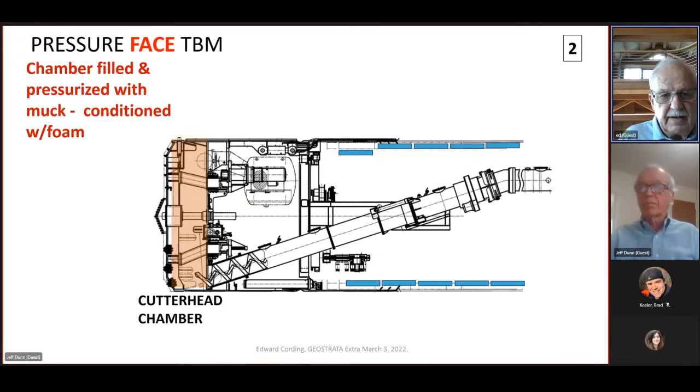So this is a pressure face TBM, and you'll see in the next couple of slides that the chamber in the front is filled with muck, and that's an enclosed chamber. It's conditioned with a foam, it may be bentonite, and that's what's holding the face and balancing the face. The control on that is the screw.

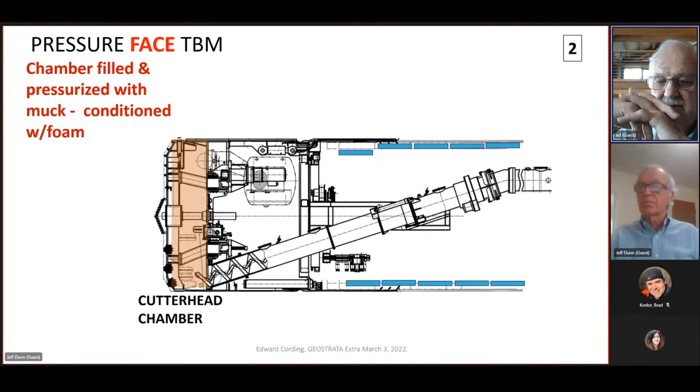In the next slide, it shows the screw, and that's for the earth pressure balance, and that's what's removing the muck. It has to be coordinated with the advance so that you provide the required pressure. So that's what we've done with the pressure face TBM, developed maybe as much as 50 years ago. There's a tremendous change in the understanding.

You would not probably have been using that, and we were not using those machines in the United States 50 or 40 years ago. It's taken some more development for them to be really reliable and all.

But the first criterion is to prevent that inflow at the face. We don't have to dewater, we balance the water pressure, and as you see on the next slide, we balance what's in the front of the face with the pressure we apply. So that's the primary thing we talk about with pressure face TBMs.

And then as you can see on the next couple of slides, we're talking about the pressurized TBM. The first thing that happens is there's muck that can push out around the cutter head and fill the gap, which you have to have to be able to steer it and push the shield forward, which is going to be on the order of about 20 or 30 millimeters. So that gap is going to...

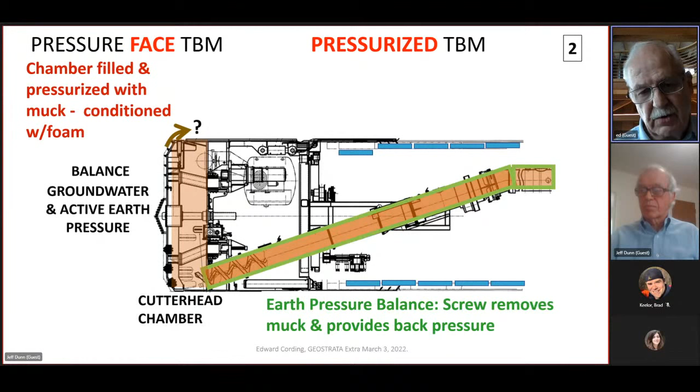We don't want to say we're going to be doing it most of the time and then miss. This is what's causing the settlement, is the lack of filling in that overcut, and that can cause a couple of inches of settlement.

So the overcut shield gap, now what we're using on our projects and requiring on Los Angeles Metro, and required on the large diameter tunnel in Seattle, is that we fill that overcut gap and pressurize it with a bentonite slurry for consistent control all the time. We don't want to lose ground, and that's what's being done.

In the tail, as you can see on this last little bit, the tail of that TBM is where the grout is injected, and it fills the gap during advance. That's become very much a standard, and it has basically eliminated issues with ground loss back at the tail, which can cause 4 or 5 inches of displacement if it's not filled. So those are things that I think we need more progress and effort on, using that shield gap and understanding the cause.

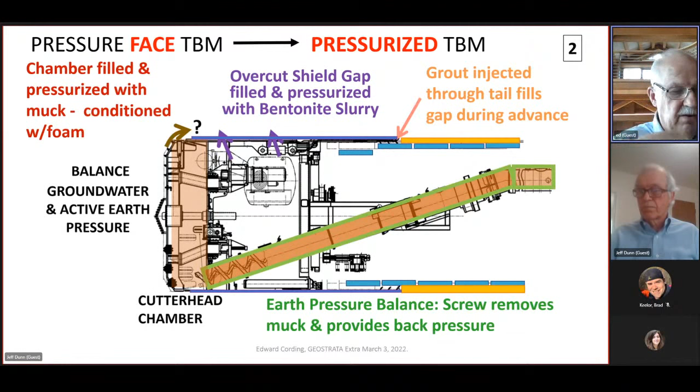As you can see in our next slide, there's several things that in practice we recognize: pressurized TBMs, pressure face TBMs, reduce ground loss, and the muck can fill the gap, but not always. There tends to be a reliance on estimating what can happen by some percentage of ground loss of the volume of the surface settlement trough, based on previous projects.

Often the source of the ground loss is not well determined. For example, if you're measuring the surface settlement, how much is occurring into the face or on the shield? Typically people will say we've lost ground because the face wasn't supported. What we're finding in projects we've had, even over the last 40 years, is that the movements around the shield are what cause the regular settlement trough for the most part. So that's the area you really want to focus on, in addition to the face, in terms of controlling ground.

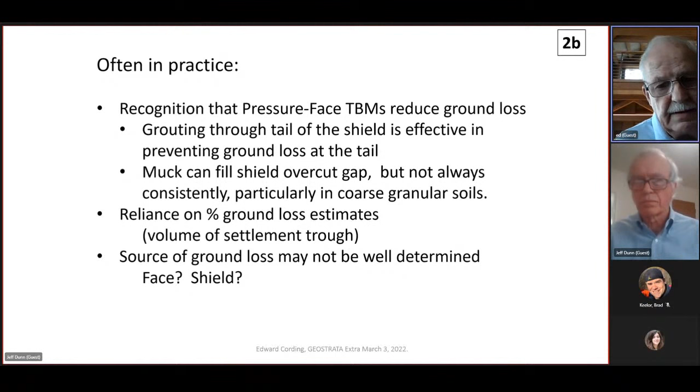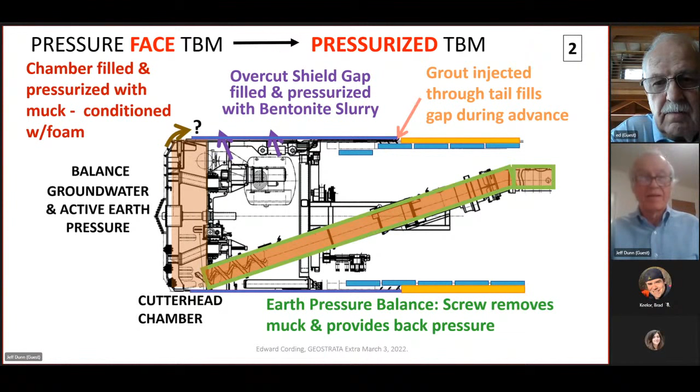Now let's go on a bit here to the next slide. Let's see here. There we go. My mouse wasn't cooperating. Now go the other direction. Oops, I'm sorry, I pushed the wrong key. Well, we'll get it, Jeff.

Here we go. Okay, now we have all this instrumentation that people are doing on projects, but the instrumentation we're interested in for this TBM is not so much what's happening on the buildings. We want to monitor the buildings just to know that nothing's happening. But what we want to know around the TBM is exactly what's happening close to the TBM, related to how we're operating it. This is the information that I really want to see our projects putting together.

One of the issues sometimes is that we have instrumentation people doing the instrumentation and operations looking at the pressures and the operation, but the two often aren't coordinated as well as they should be. With this, now we can identify the source of the ground movements, see what the magnitude is, and show that those movements are small and within our criteria, such that we have confidence that we can tunnel forward and be under control when we go under critical structures.

We're using the borehole extensometer, piezometers in that overcut, and their relationship to the pressure gauges is such that you can tell if you have an outward hydraulic gradient that's holding the ground up, just by comparing that shield pressure and the piezometers. And then we're now using HDD more and more in LA.

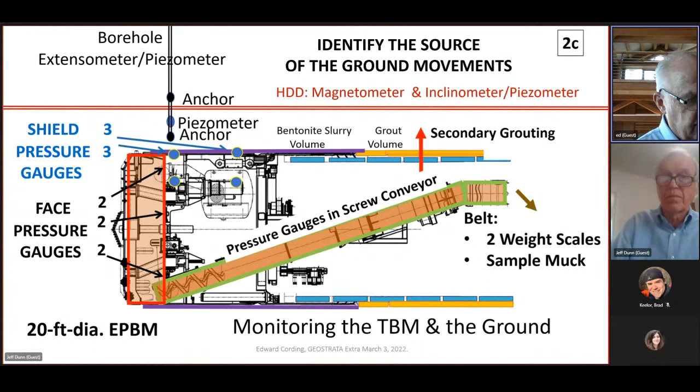So these are the things that figure shows, the things we need to be concerned with, and we need to be correlating those measurements with the pressures being measured on the TBM. To me, that's the reason we haven't made more progress. I think we have made a lot of progress, but part of it has been to recognize just where the causes of the movement are, and then try to work between the various groups involved, such that we coordinate that effort between instrumentation and the TBM.

The other item is large diameter tunnels, and when you're tunneling at shallow depth, that's where perhaps the most progress has been made in this coordination. It really started in Porto, Portugal, with an 8-meter machine, and then Barcelona, with a 12-meter machine, where they were starting to really pressurize or fill and pressurize that gap. So we followed up on other projects in Toronto and the Alaskan Way project in Seattle. It was also a requirement, and we're requiring this in LA.

Good. So that gives us some... oh, sorry, Ed. No, you go ahead.

Okay, so that gives us some really good background on the evolution from pressure face to pressurized face and so on. You just mentioned Alaskan Way and that view of the TBM, which to me is really impressive, 57.5 feet in diameter. You discussed the Alaskan Way viaduct replacement constructed with that large TBM, resulting in surface settlements that were very, very small, which is just an incredible accomplishment to my mind.

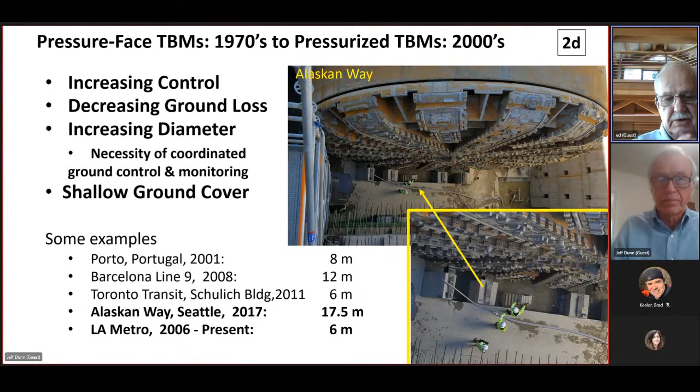So going on to this next slide, there's a couple of points I wanted to make in addition to the fact that we had small displacements. If all we were looking at here, Jeff, was small displacements, we could just add this to the list of projects showing how much displacement we had. But the question is, why did we have that, and can we count on those conditions? What do we need to do to duplicate that on other projects? What is it that is causing the movements?

The two things I wanted to focus on: first of all, once that TBM left Safe Haven 3 and went under downtown Seattle, the viaduct, Pioneer Square, and the high rises, it was underneath buildings almost all the time.

What I saw with the operation, with the joint venture Seattle Tunnel Partners - a joint venture of Dragados and Tutor Perini - was consistent operation all the way through, in two major areas. One was the settlement I'm concerned with, but the other area was with respect to the TBM.

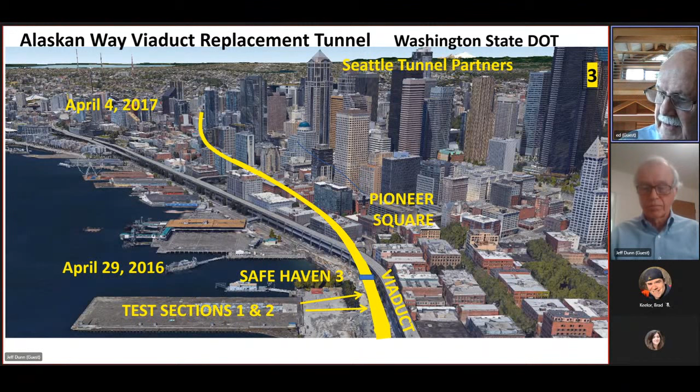The other thing I'd like to point out is this is an 11 month, 5-day project. When you get in a project that's really working and you see a tunnel operation project, it's all a linear system. Everything has to work, there's a rhythm to it. You can see the people working on it are doing a good job, that they like their work and it's efficient, and that's what I was seeing on this project.

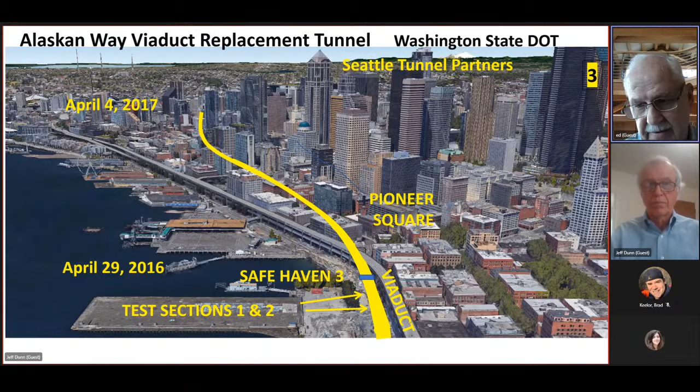Going on to the next slide, a couple points here: the consistent control, not just what I've talked about with the main bearing, but the consistent control of the face. It's not just that we had small settlement—these were the things allowing us to have small settlements, causing only small settlement. Maintaining the face pressures, the upper face pressure is your guide, and maintaining that even between shoves.

They would inject large volumes of bentonite in the chamber to keep that pressure up all the time between pushes of the machine, which are about 2 meters at a time, then you'd have an hour or so for erecting segments, and you'd have a couple of days on the weekend. That's when they kept that pressure up, so they never let it down.

They always vented the upper chamber so that any accumulation of gas bubbles from the muck and foam that would cause a large bubble on top were prevented, so you didn't get free flow of soil into that upper chamber. They vented that throughout the entire drive, back onto the conveyor belt, making sure you don't have a gap up there—a void that's compressed but not supporting the effective weight of the soil.

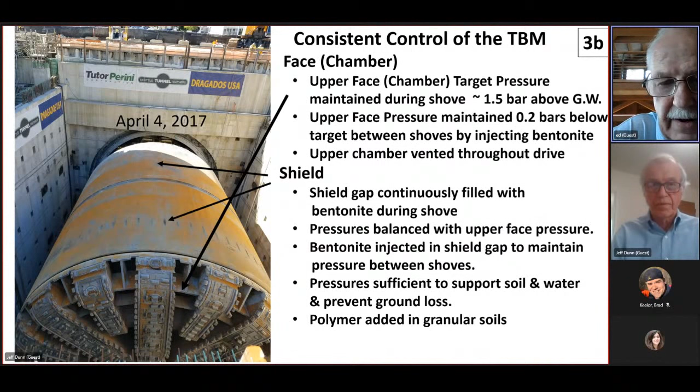Okay, going on, just a couple things we learned. The next slide shows it's not just that we had small surface settlement—we're measuring the settlement a few feet above the TBM, and you can see the settlements were almost zero when we were down at shallow depth. But right above the TBM it got up to about 6 or 8 tenths of an inch in the central part, because we were putting a pressure on that machine balancing the flat groundwater level, and basically had a much higher differential with the overburden.

The settlement was not due to anything falling into the gaps, it was due to the pressure differential, which is just like an elastic equation. The pressure differential is basically overburden minus the internal pressure, and if you want to reduce that further, increase the internal pressure and you further reduce settlement. That's what it's due to, and it's very clear from all this instrumentation that that was what happened.

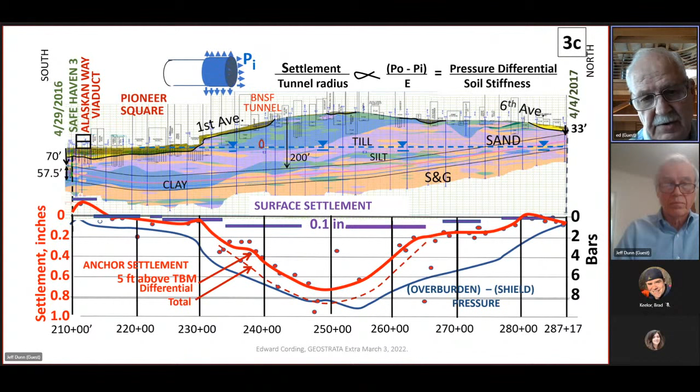So those were the additional things I wanted to focus on, Jeff, in addition to the surface settlement being small, a tenth of an inch, and a little bit larger when we're down at 200 feet than when we're down at 100 feet. That was due to this difference here—the opposite of what you'd expect, when people say we're going to have large settlement, you'd expect it to be at shallow depth. Okay, let's go on to the next slide.

So there wasn't any ground loss, and the displacements were elastic. This is the machine after it came out of the ground. Next slide.

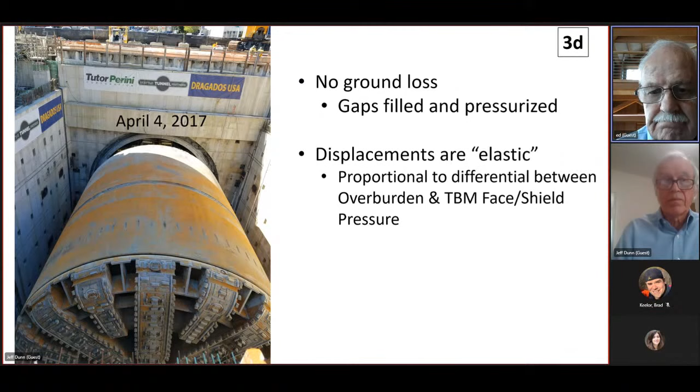You mentioned in your commentary, Ed, that you've talked in good detail about the control that was put in place and maintained. But there were also some planned mitigation measures, some of which were implemented, like micropiles, which caused more surface settlement than the tunneling efforts themselves, and some contingencies like compensation grouting that, if needed, might cause displacements but fortunately wasn't used. It made me wonder, overall, was there wasted mitigation on the project that could have been avoided, in hindsight, of course.

Well, I don't want to answer this in hindsight, because we weren't operating here as Monday morning quarterbacks. When I say we, I'm talking about the project.

I was able to work with them, and I had a tremendous opportunity, but there was the history of this thing, and somebody should go in and really summarize all the different things people were thinking about doing for this, driving the world's largest tunnel boring machine under downtown Seattle, with foundations within 15 feet of the crown of the tunnel. I told some people I didn't get involved with the design of it. I said I'd like to wait and work with the contractor on this. I really wasn't invited anyway, but I was able to work with the proposers, one of them, and then finally with the other proposer who actually got the job.

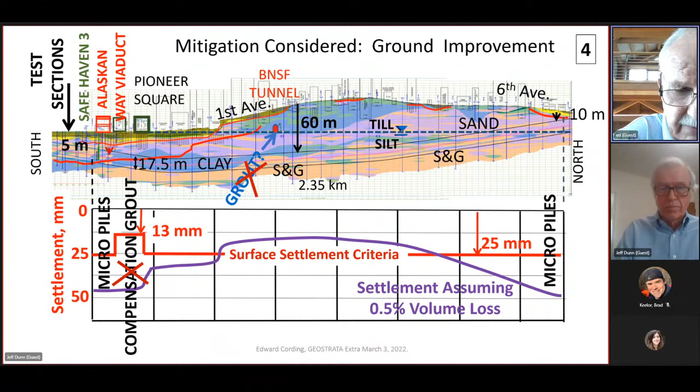But we saw that our movements were small, and the joint venture proposed to Washington DOT that they eliminate that. They agreed because they saw what we were doing, and so those were some things that did get changed.

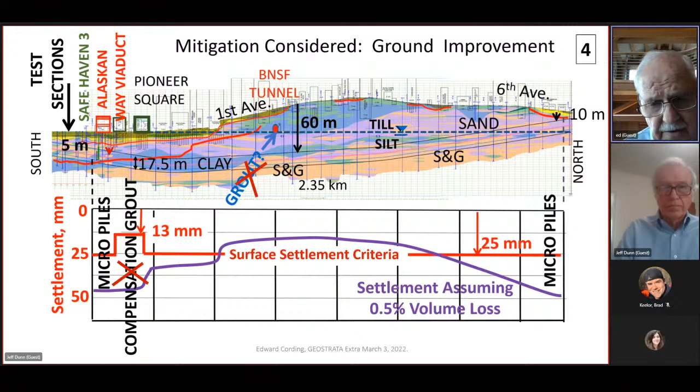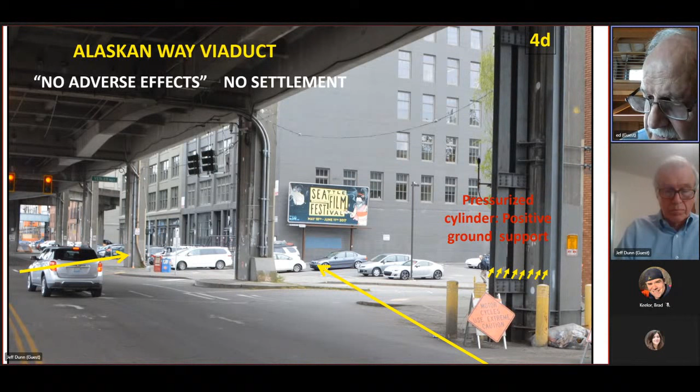Going on to the next couple of slides, here we are starting underneath the viaduct, going under it on a weekend with no adverse effects. First time I think the project was above the crease on the Seattle Times with positive statements. At this point, the project really was just receiving some really good credit for what was being done.

That's a pressurized cylinder we have that is supporting the ground. Going on to the next slide.

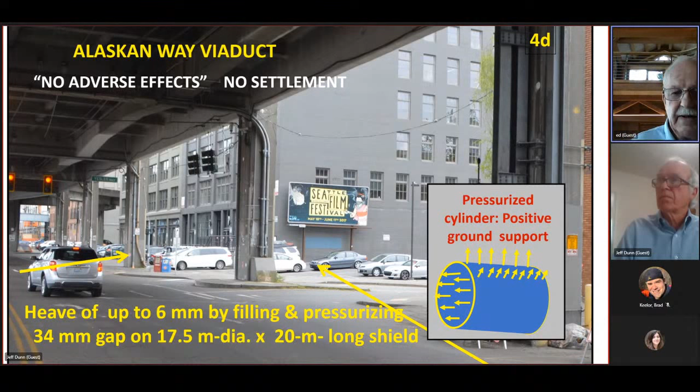Tunneling underneath Pioneer Square, there's this one building we're going by, and at that location was where the compensation grouting was supposed to be installed, and we didn't. The building was in very poor condition, an old brick bearing wall building, and you could see on the foundation that different piles in different periods had been installed. You could see settlements and displacements in the foundation and basement on the order in excess of a foot.

So they went in and stabilized that foundation with grade beams. You just don't want to be going by, even with no movement, a building that's sort of metastable. So they did do that, but they left out the compensation grouting.

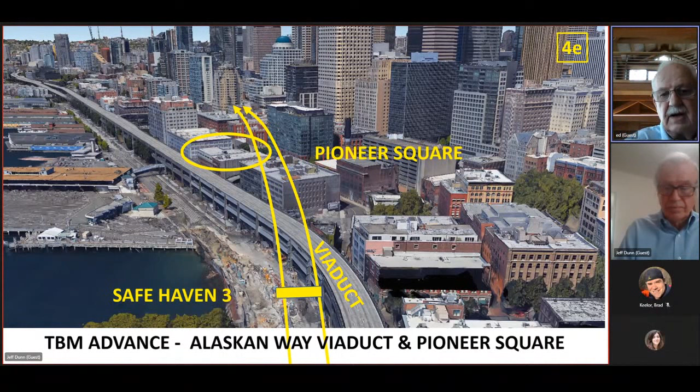On the next slide, you can see us moving the tunnel project into front of that building on the left. The settlement right above the TBM was closely monitored - it was about 1 millimeter, and the surface settlement we couldn't pick anything else up. So it really proved out what we said, and what WashDOT approved, was that we didn't need the compensation grouting.

Okay, good introduction - or discussion, I should say - of Alaskan Way. So in your commentary, you talked about filling the physical gap, then referred to gap number two, which you said was an indication that there was a definite need for better coordination between pressurized TBM operations and geotechnical monitoring, which you've talked a little bit about. That coordination is critical to reducing settlements. For both the Alaskan Way project and the current project on the Los Angeles metro system, this coordination seems to have occurred and been very successful, as noted in your commentary. How was this brought about?

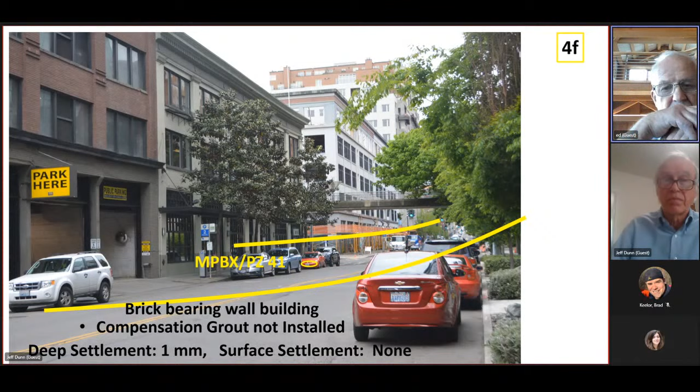Okay, let's go forward to that next slide - I think it describes some of what was being done, and you could click through these a bit to fill the page out. We start out with the Seattle Tunnel, Washington DOT. WashDOT put a lot in there, in addition to things like requiring the micropiles and requiring the compensation grouting and all. This is the part that really was the mitigation as far as I'm concerned - things that related to the TBM itself.

The Construction Monitoring Task Force had to meet daily - a meeting between Seattle Tunnel Partners and Washington DOT Construction Management and Engineering. Then you got down to the tunneling level, with the TBM operation and all that instrumentation that comes out - about 5,000 tags on those machines, a tag being the measurement of something recorded with time. Then there's all the data coming into the project from the instrumentation team, coordinated and worked through with that geotechnical monitoring team working directly for the joint venture, employed by and within the joint venture.

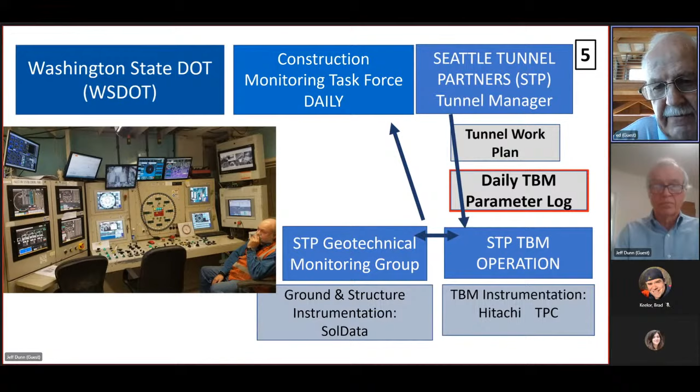So WashDOT required a very detailed description in their specs of the construction monitoring task force. They required that bentonite be injected to fill the overcut gap, and then they required borehole extensometers on the closest spacing I've ever seen, averaging 50 feet over the whole TBM drive, something like 150 extensometers.

Bill Hansmire, some of you may know, worked on projects with PB at that time and on LA Metro. I told Bill, you really overdid it putting these things on 50-foot centers. Now I'm working for the contractor doing that work, and I will be forever grateful, because the contractor had the resources to get the information that I think allowed us to show what did happen around that tunnel boring machine.

The other part was Seattle Tunnel Partners, working with Tony Sturbies, who was in charge of that geotech team. I said, over on Mike DePonio's job at Sound Transit, JD put in vibrating wire piezometers—why don't we do that? So Seattle Tunnel Partners added vibrating wire piezometers along with all the extensometers, a tremendous amount of information.

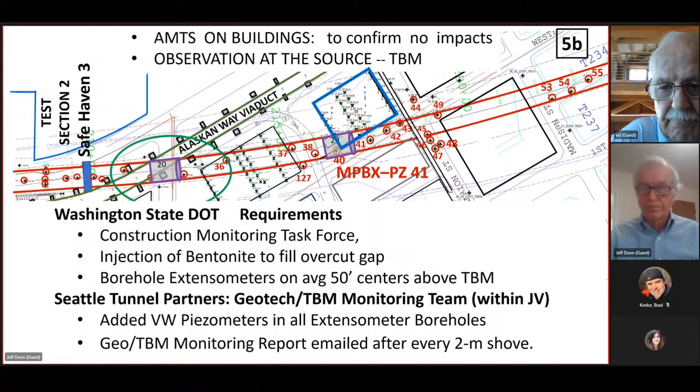If we go on to the next slide, I wanted to talk a little more about LA Metro. Here I'm working on the other side, you might say, for the tunnel advisory panel. We basically have an approach with LA Metro, and the management is supporting this fully and implementing it, to demonstrate consistent ground control on all projects all the time. That's really the sort of thing that's in the specifications.

They're requiring the filling, and they're requiring gauges on the perimeter of the shield to measure those pressures. The first time that was required, the manufacturer said, why do I have to do that? The short answer was that your client wants it, but the real reason was that we want to be able to show that those pressures are being controlled.

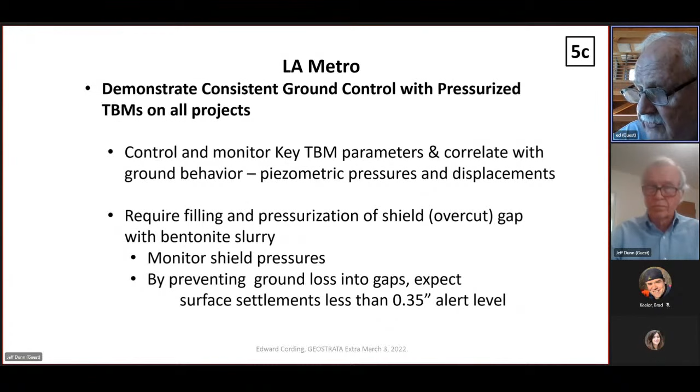What we're finding is that our surface settlements are less than 0.3 of an inch. Right above the tunnel we're getting on the order of 1/10 to 0.3 of an inch, depending on the pressure we're applying. But we get that because we're filling the gap. So the next slide will show that.

The shield pressure is balancing with the upper face pressure—it's hard to pick out, but the green line is the upper face pressure, and the other two plots are the upper shield pressures around that tunnel shield. Now, if the overcut gap isn't being filled, it will not track with the face pressure, and you'll see much more variation.

This is the best one I've ever seen—the two are just the same. You can have a case where between the shoves the pressure might drop off a little bit more on one gauge than the other, but this one is just perfect. That's what's giving us the confidence that we are filling the overcut gap.

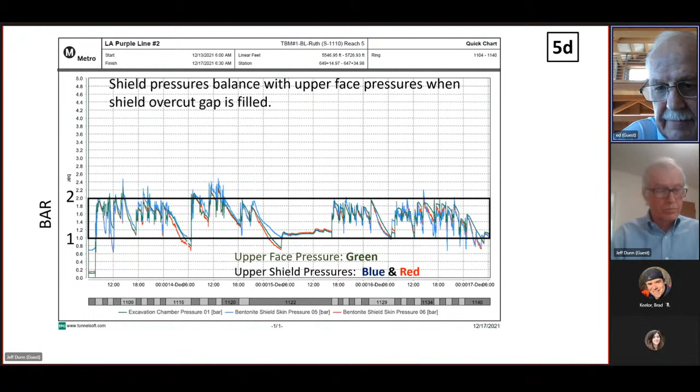Going on to the next slide, we have the chamber pressures at the bottom and the upper part of the TBM. The upper chamber pressure is always lower because of the head gradient, then the middle, then the lower at the top has the highest pressure. Those need to be separated by about 0.8 of a bar difference between upper and lower in order to show that you don't have a big gas air bubble, and that you're basically balancing with the fluid pressure of the muck. That's extremely valuable information.

That's being put out, and this is being done by the Metro project, not the contractor in this case—at least that's what I'm seeing. We're seeing this coming from Metro, and it's being summarized by a project management team that has a lot of tunnel experience.

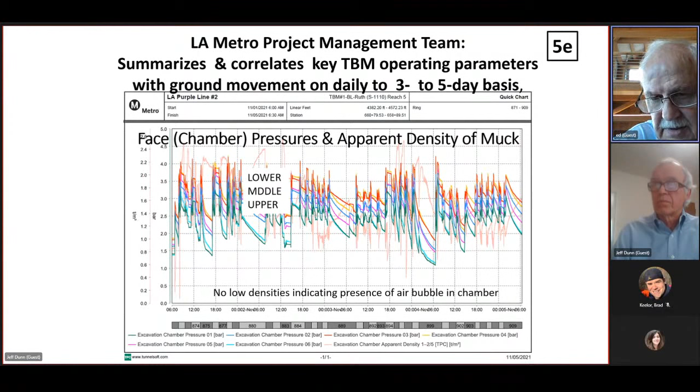So those are the things, and it's the construction management team—Metro's construction management team—that is really doing a lot of this coordination and working with the contractor. But the contractor's performance here is excellent. I think that's the end of that one.

For the question—one has to do with the contractor, Jeff, meeting requirements that were coming from WashDOT. Here what I'm seeing is the owner, LA Metro, saying we are going to have consistency. We want to be able to show that when we get to the next project, or when we go in with third parties under somebody else's building, that we can say with confidence that we can do this with these machines.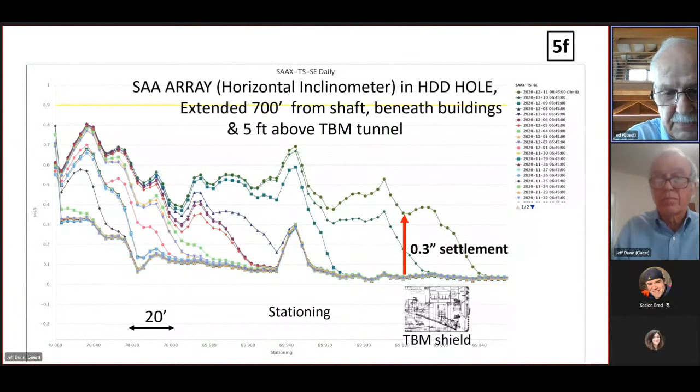That's a good question, Jeff. I've got a case history on that I'd love to tell you sometime, but we don't have time for it. I hadn't heard us use this term 'baffled' on our projects, so I looked up the definition—it's a very interesting term. The dictionary says it means feeling confused, totally bewildered, or perplexed.

And it kind of reminded me of a song—was it South Pacific? A love song, something like 'bothered and bewildered am I.'

So to me, baffled brings up some important concepts, but that's not how I see it. Essentially, we've got to design and build in an environment of uncertainty. We're never going to have all the answers, and civil engineers have to build in such a way that their project works despite not having all the answers.

But the other part of this is the observations—we have to make the observations. Jeff, I'm not sure we have time to go through this, but...

I found, working on projects where there was building damage, and sometimes working with insurance companies that had a claim against a contractor who had done a nearby excavation...

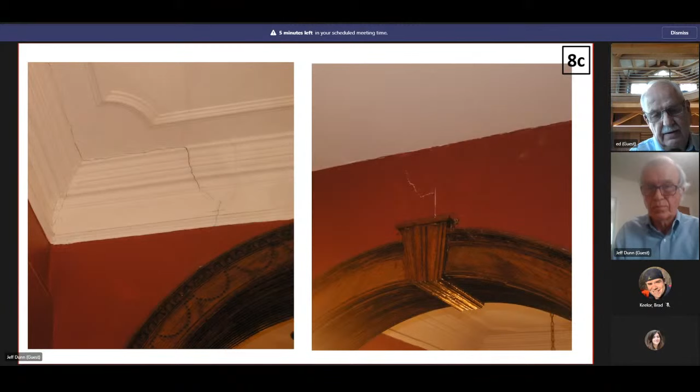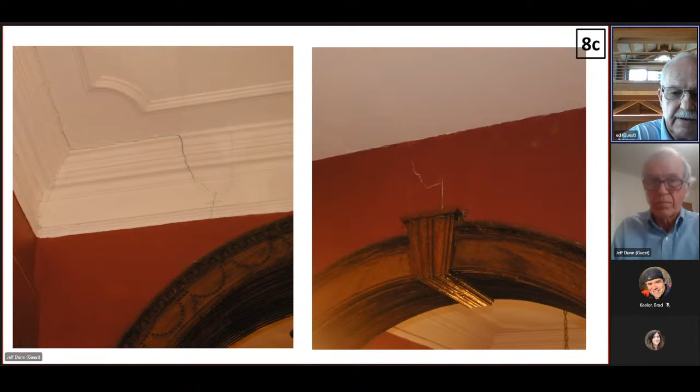I was asked to take a look at it for the people that had been doing that excavation. They said, we couldn't have caused this, we're 100 feet away, how could we have caused this damage? So I started looking at it. The next slide will show a little more.

There's no tie between the walls. The characteristic of the building on the left, a 1920s building, was all concrete floors tied into brick. So the concrete floors are giving it some lateral connection.

So if you get a displacement on the left side, the building is side swaying, a very small amount. The left wall or the west wall of that White House, the Monroe house, is essentially right up against the other bearing wall of the hotel, and it's going to go with the hotel, because that stairwell on the left side is a weakness.

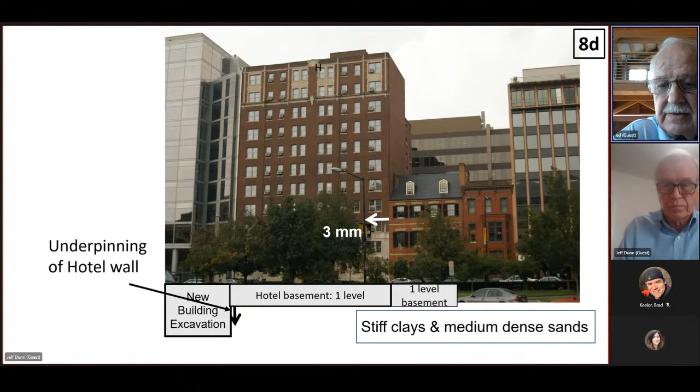The next slide shows what's happening here, and the interesting thing is that the 50 millimeters of settlement was just due to the fact that they used green timber 200 years ago, and the intermediate timber bearing wall was settling. That's what you see there, but then you could pick up a few cracks here and there, and that 3 millimeters was giving you that small distortion.

So the thing that's interesting here is these are targets of opportunity, often poorly monitored and instrumented. The building is the instrument, and those observations I think were so important. Not the observational method, but observing what the conditions are and using that building as an instrument, essentially, to tell you what had happened.

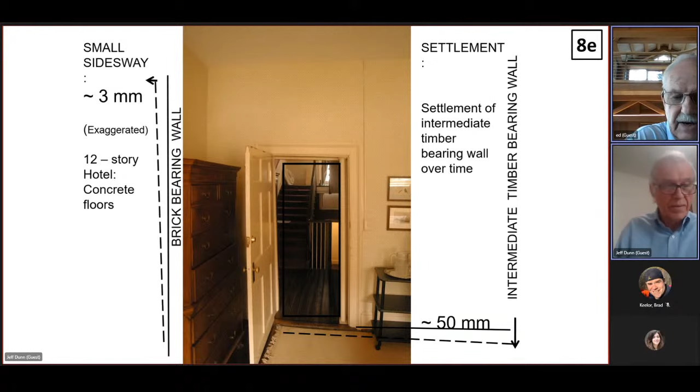So the next slide, I think that covers that case history. That covers that one, yeah.

But to me, it was kind of the other end of what we've been dealing with here, Jeff, in that we're talking about not causing any damage, and where I've seen damage and been able to get information that we've used in our research and numerical analyses and model testing for building damage is based on these targets of opportunity.

Okay, this is not something that LA Metro would be doing or WashDOT would be doing.

Well, I think from that issue, that wasn't a baffling problem, like you said. I find that sometimes the words we use commonly, if you go to the dictionary, you find out really well. To me, it was a fascinating question, it really caused me to start thinking. It wasn't so much that people may have been baffled, but that as engineers, we shouldn't be baffled. We should be trying to figure out how we do it, what to do.

Well, a couple more questions, and then we'll be finished up for the session. But one thing, you have a background, your bachelor's degree was in geology. You talked about how you started out in that field and things you really enjoyed about it. Geological education, which at one time was very common, I know for myself, for civil and geotechnical engineers, has been kind of waning.

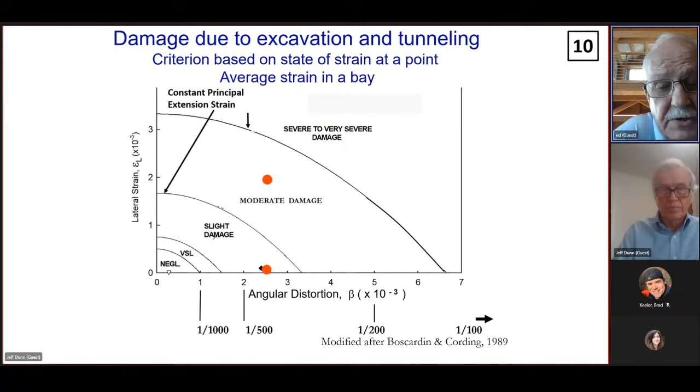One of the things is I worked with Marco Boscardin on his research at Illinois, and we basically came up with this relationship between what happens in the building - the angular distortion - the ground movements with excavations and tunnels, and then the impact on buildings in terms of the angular distortion and lateral strain. You sum those, and that gives you, for buildings, the principal extension strain. That turned out to be the boundary between these values.

This slide just points out the focus I've had in the research, going from first looking at what happens right around an advancing tunnel, then we looked at the distribution, and then we started looking at what's happening to the building and the damage in the building. That's been an important area, and this is being used widely in the industry - I think it's a very useful diagram.

And the thing about it is when we start talking about pressurized TBMs, sometimes people say well we only have to have slight damage, it'd be just some cosmetic cracks in the plaster. And what we're doing now in the LA Metro is holding settlements down so we're in the bottom of that negligible range. We don't want to be dealing with third parties that have to redecorate a series of houses along our alignment.

I think as we progress in our capabilities as engineers and contractors to build and control the ground, we find that the communities are also advancing in their demands - and maybe rightfully so - but the demands for not being interfered with and not having to deal with impacts.

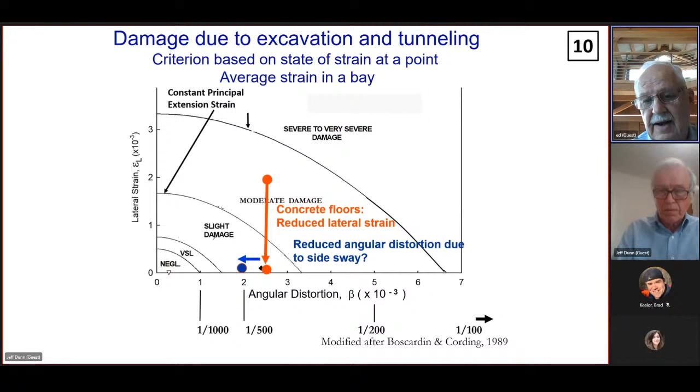And so it's important, and that's where we're going to be on these diagrams. That's what I was describing for the pressurized TBM. Now let's go to the next one, which is another area that I've worked on a lot.

You look at the RQD, something that Don Deere established back when I was able to work on some of that early work in the 60s. The RQD is a good indicator. I found that on Metro, if the RQD was less than 50%, we probably had one of these shear zones, several feet of fractured rock with clay gouge. So that kind of was one way of tying it together.

So to me, what I find in looking at the rock is that we're trying to understand geology and behavior. How is it going to behave? The first thing is to get the geology right, not just to get some sort of classification scheme that says this is class such and such, and that we need such and such support. That's kind of rule of thumb stuff.

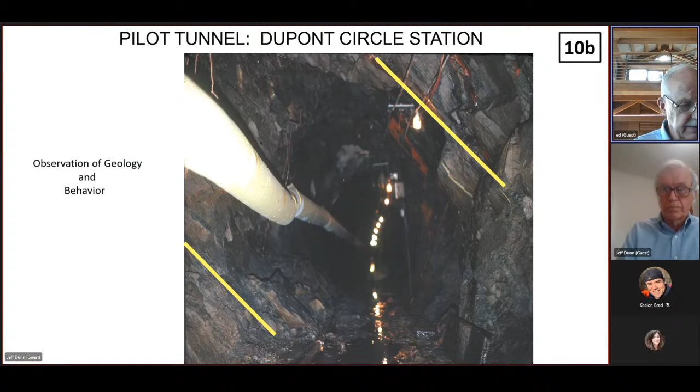A lot more to talk about there, but this was what the displacements were. The thing about it is that those displacements were extremely significant on the sidewalls. We were getting displacements in on unsupported sidewalls, and because the joints were so planar, we were getting movement also occurring up above the top of the tunnel, and that can only occur if the rock isn't dilating, if it's not interlocking.

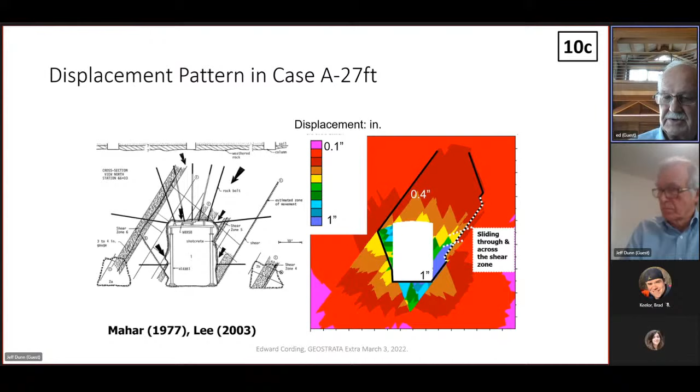So that was a very unique characteristic, and we did the post-construction numerical analyses, the discrete element, distinct element, that really were interesting studies that Lee in this case did to compare what Mahar was measuring when he was Jim Mahar out in the field on the Washington Metro. So look at the ground, look at the orientation, understand the geology, and then figure it out.

Finally, just getting back to the last topic, the first topic we talked about, is that one of the things that stopped the use of the large diameter TBM for stations is that people are saying, well, it needs to be down here at the depth that I'm showing, and that's causing access shafts to be deeper, access outlet by escalators to be more difficult.

And what we're seeing now is, with the type of control we have, we're looking at designs and projects where we don't have to use a diameter and a half of cover above a 40 or 50 foot tunnel, or even larger. We can go in with diameters that are more on the range of 3/4 to 1 diameter and control the ground very well. That puts us down at depths that are on the order of 40 feet, and that's the depths we can work with on these types of projects.

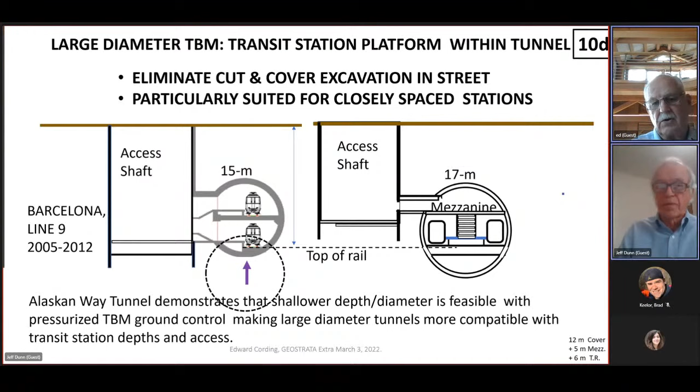So this is one of the applications that's going to be seen more and more. In San Jose, they're planning it. They've talked about it in other projects. We're going to see these large diameter TBMs where we are really reducing the use of excavation in the street. The cost of a station box excavation is extremely high, and there's a lot to be achieved by being able to put the platform and even a mezzanine in the tunnel. So that's some of the results of what we've been talking about for the last hour. Those are kind of the three areas that I would say are things that I've been working on and contributing to.

Okay, well, wow, we've covered a lot of ground and supported a lot of ground, I guess. That's a good analogy. Some phenomenal details about Alaskan Way, I'd heard all about the bearing replacement and the access shaft and everything, but hadn't heard all of these details about it, and knew the tunnel was built very, very successfully. I think you've brought that home.

I want to thank you for your commentary and for your time here and questions. Is there anything you want to add in closing real quickly?

I don't have anything else to say that I think of at the moment, but I've just enjoyed being able to talk with you. Your questions really caused me to think beyond just presenting something, and think about what is it that we've been doing. We are in a wonderful... I can't think of a profession that I'd rather be in. The people I've worked with, the engineers, the contractors, the owners, people that are committed. On these projects, no matter how tough it is.